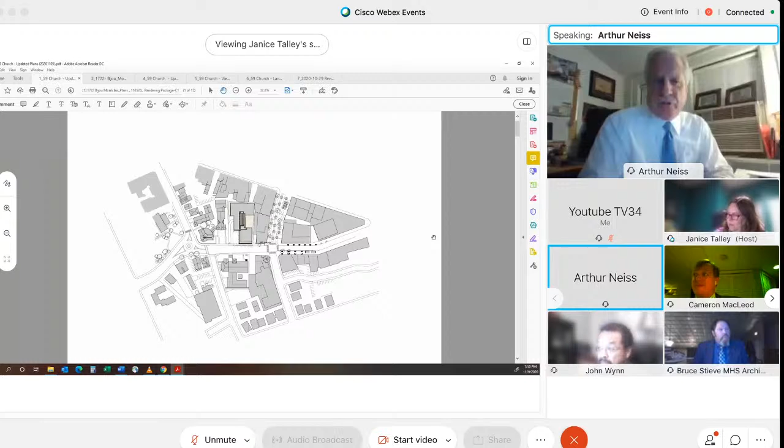So generally, I would ask Mr. Stieve to acknowledge once again that you remain under oath, and you understand that, sir? Yes, I do. Very good. Thank you.

Great, so Bruce, if you can summarize — what's on the screen right now, for the benefit of those who may not be on the video or otherwise, is a colorized version of the updated architectural renderings prepared by Marchetto Higgins Stieve, dated as of the plans submitted to the board, updated to reflect a colorized site plan. And we, I believe, have marked these as — I don't think I have the colorized one on the exhibit list, okay, so I guess it would be A48. Okay.

And I guess it would be A48. Is that the entire plan set that we're marking that way? It is—unless it's A44, the updated site plan dated 11/5/2020. Yeah, it's the one I submitted to you Friday electronically. So that should be the same set. Okay, then I would say it's A44. Okay, then it's A44.

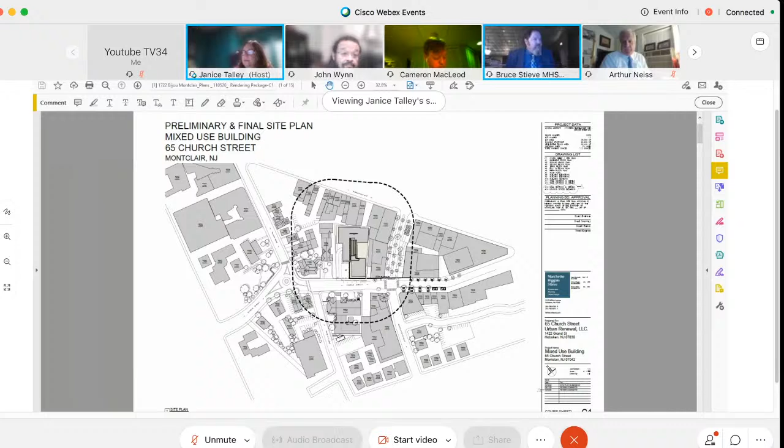Sure. Thank you, it's good to be back tonight. Since we were here last time, we've been busy working on improvements to the project based on comments from this board, the board's professionals, and comments made by the public during the last planning board hearing. We've also had the opportunity to meet and discuss some of the concerns of the board's professionals, and these plans reflect updates based on that information.

So I'm going to start quickly by going through some of the plan changes and then dive deeper into the building facade developments. If we can go to the next slide, please.

So this is the basement parking level. We had a meeting and discussion with Mr. Giosa, the board's parking consultant, and there were some issues he raised in his letter and report to the board about some of the parking configurations. So we looked at ways we could improve those conditions.

Starting in the basement level, we moved the main electric room for the building down into the basement. This required us to relocate two parking spaces to the western portion of the garage, which pushed the parking slightly out under the planted area of the plaza. This allowed us to take the electric room that was on the upper floor and reconfigure the upper floor parking. If we can go to the next slide, please.

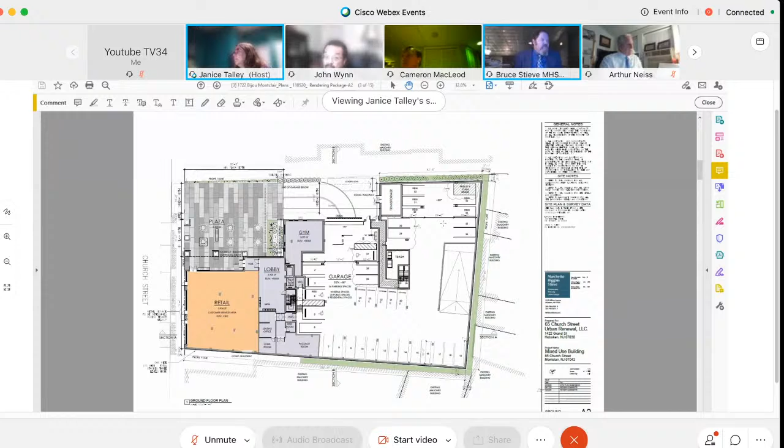The developer for the project has been meeting with the neighbors, and one neighbor who has a restaurant on Bloomfield Avenue suggested he'd like access to the alleyway behind the building to reach his restaurant. So we are proposing to put a door in that parking space located at the back of the parking garage to allow access to the alleyway. We'll be showing this door in the next round of drawings we submit.

There were just a couple other minor adjustments made to this floor. Another thing we did was number and label the parking spaces so it could be better coordinated with the parking management plan, which we'll have further testimony on later. So those are the updates on the first two floors. If we can go to the next floor plan.

And that would be the first residential floor plan, A3. That's okay, you can even leave it here.

The plan changes are pretty much consistent on all of the floors. One of the things we did on the floor plans was identify the affordable units, and one of the items raised in the planner's report was the discussion about the sizing of the affordable units. We've had discussions with the owner of the project, and we're going to be moving the affordable units around within the floor plate of the building. We'll talk about that a little bit more. But in this drawing, we made some adjustments to the smaller 2-bedroom units to show a 2-bedroom, 2-bath.

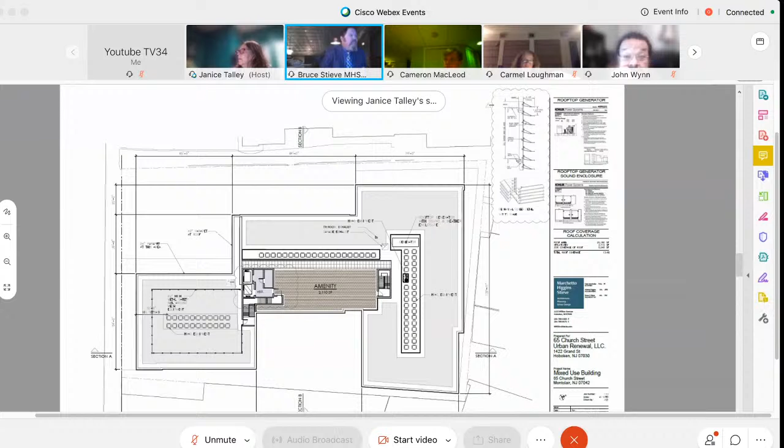So Bruce, do you want to show the side angles to highlight the change you're talking about? Would it be better to show that through this plan set or to move to the renders? The plan set has been updated to reflect all of these changes, but I think the exterior building elevation changes are probably better served in review through the fly-around video and the rendered images we're going to talk about next. So if we need to, we can come back to these, but I think the next thing I'd like to talk about is the three-dimensional video.

Mr. Stieve, before you leave the roof, may I ask a question? Yes. On the generator, what is the purpose of the generator? What will it power? I think I asked that last time, and I guess I forgot the answer. Yeah, the generator is sized to power the emergency life safety features of the building, and to be able to provide enough power to operate the garage doors in the event of a power outage.

So is it just the garage doors, or is it whole life safety? Yeah, it's all the life safety - the egress lighting, the fire alarm systems, all of the life safety functions of the building. There probably will be a few outlets in the lobby area powered by this, but it's primarily for those functions.

I have a question before you leave what you were just showing. Do you want us to ask questions or do you want to wait until you're finished completely? Whatever's easier for you. Okay, so I have a question on A1.

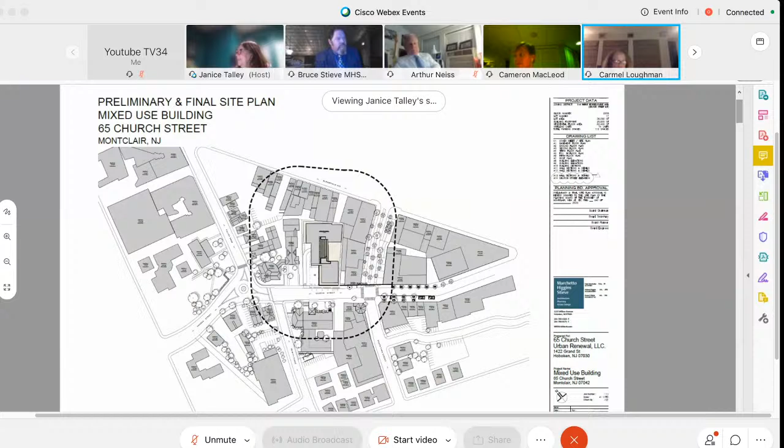So you have these fast charging stations for electric cars, and they're for tenants only, correct? In this instance, the electric charging station requirement in the redevelopment plan was for the residential parking stalls. But the owner has said that if electric charging stations are desirable, they're difficult to manage, so again, we meet the requirements of the redevelopment plan by placing them in this location.

So my question is, if no one has an electric vehicle, will those spots be assigned to somebody, or will they be available to the public? Again, that's a building management issue, and something that building management would control.

What I can say is everything on the bottom floor here is being geared toward strictly residential parking because of a number of safety issues that come from introducing public parking up and down the ramp as it's designed, and as various concerns were raised by Mr. Giosa in talking with him and reviewing the plan. In order to maximize the parking on the ground floor, everything down here is going to be residential.

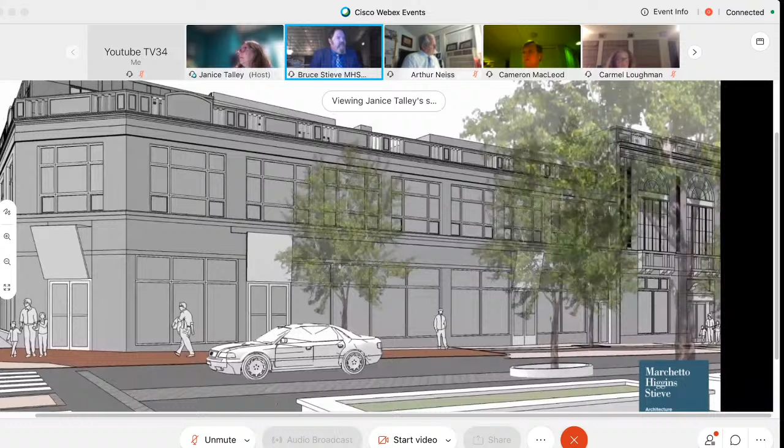The next exhibit we're going to share with you is the 3-dimensional walk around. If you can rewind that, please. Thank you, perfect.

It was discussed, and it's also a requirement of the redevelopment plan that... Do you want me to start it? If you could, just pause for one second at the beginning.

So we've generated this 3D walk around. It's a computer model that walks around the site, and it stops at certain intervals. This is actually the view of the public plaza space on Church Street. This is similar to one of the rendering views that we spoke about last time, but this goes completely around the site. So I'm going to let it run, and if you have questions, go ahead and play it, Janice.

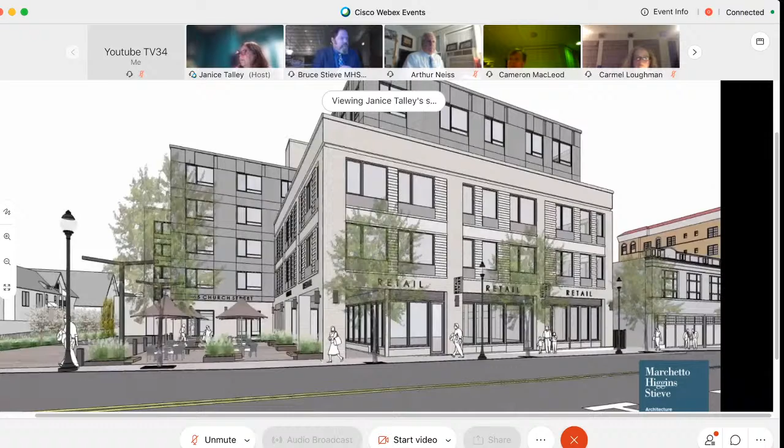This is a view along Church Street.

Coming back across South Park, looking at Blue Mercury.

Then we'll be walking along the eastern side of South Park.

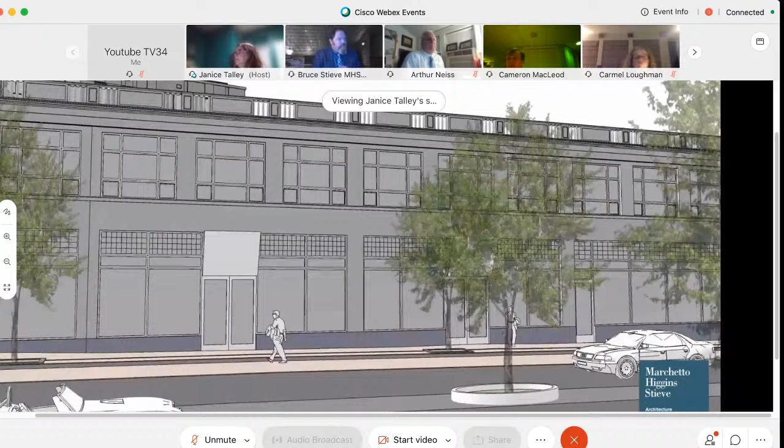You can see the building sticking up above.

This is looking west along South Park.

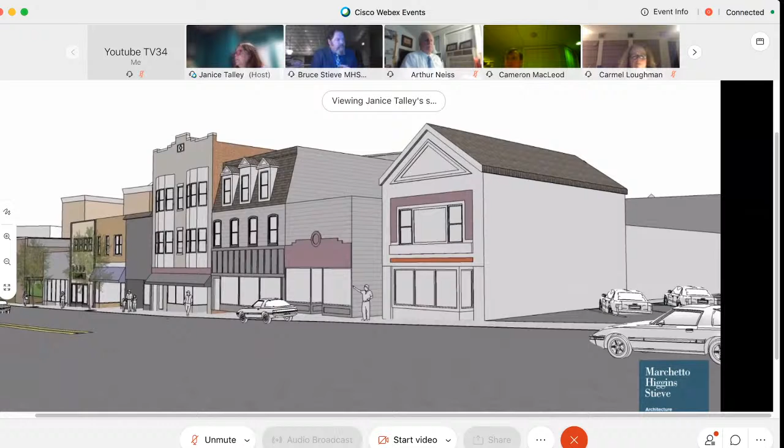Coming up to Valley. Going back to the circle.

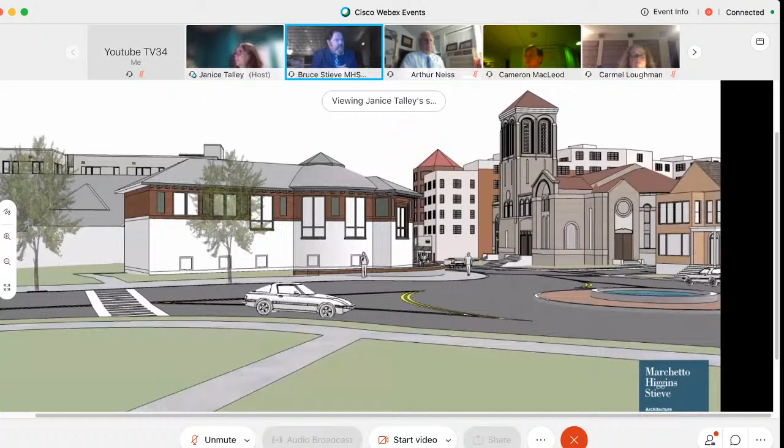I have a question, Mr. Stieve. What is the alleyway gate made of?

Our site civil engineer can speak about that, but I believe right now it's currently shown as a wooden fence and gate, and it's shown only on our property. Obviously, we would like to work with the neighbor at some point to see if we can have a joint gate in that location.

I think I might prefer to see metal. We can consider that.

All right, Bruce, do you want to walk through it? I think the board will note that there were a number of architectural changes from the last go round that are certainly significant. I think Bruce, if you can talk through those and walk through them on the rendering side of things, that would be useful.

Yes, I think that if I can ask Ms. Talley to open the enlarged elevation study. There you go. This is basically a black and white building facade detail of the Church Street side.

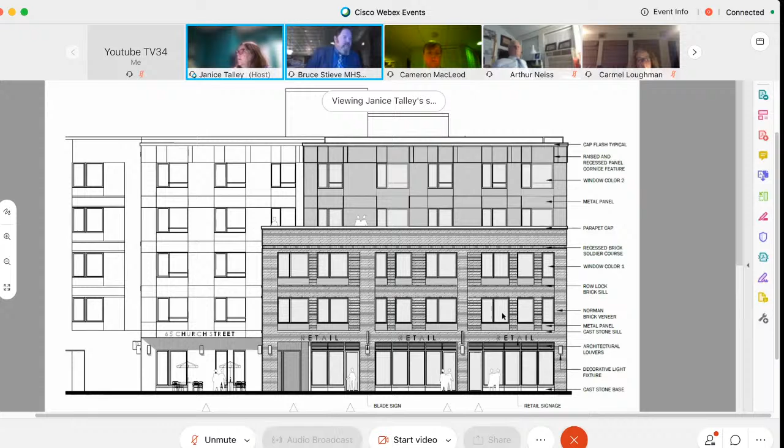The other thing that we did—I don't know if you can zoom in, but we also have an enlargement of this—we actually rendered or drew in the Norman-sized bricks so that you can see what that patterning looks like.

We also dropped off material samples to the planner's office where we showed—we actually included a couple of Norman bricks in the package so that you can see that they're basically the same size as a standard modular brick, but they're stretched out a little bit longer, about 12 inches long. So we did this drawing so that you could see that.

In addition to that modification, we added detail banding at the top of the building. This detail banding consists of projecting and recessed metal panels. This happening at the top of the building reflects a lot of discussion about how buildings in the central business district of Montclair have cornice lines, with a bit of celebration at the top of the building. So we went back and looked at a way that we could incorporate a cornice detail into the top of that metal panel portion of the building, and we've done that. This material change at the top of the building happens around the other sides of the building as well.

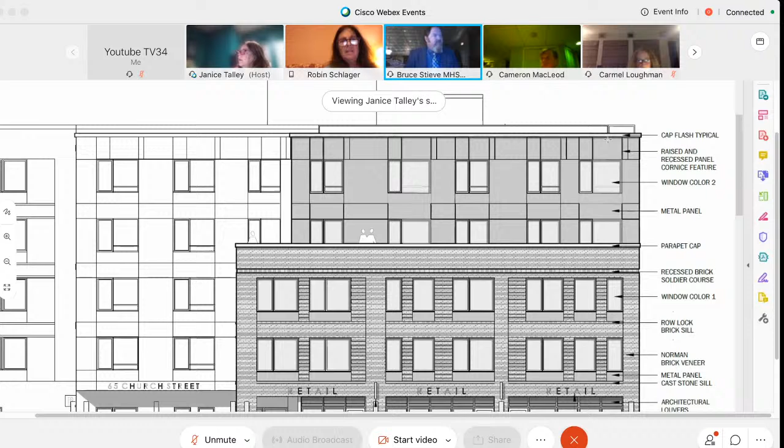Excuse me, is that flash typical? Is that this corner you're talking about at the top of the building? Is that what's marked cap flash typical? No, it's right beneath that—it's called raised and recessed paneling and cornice feature.

So it's that entire top portion of the building that's been designed to reflect the cornice line. You'll be able to see that again when we go to the rendered images that we'll be showing in a few minutes.

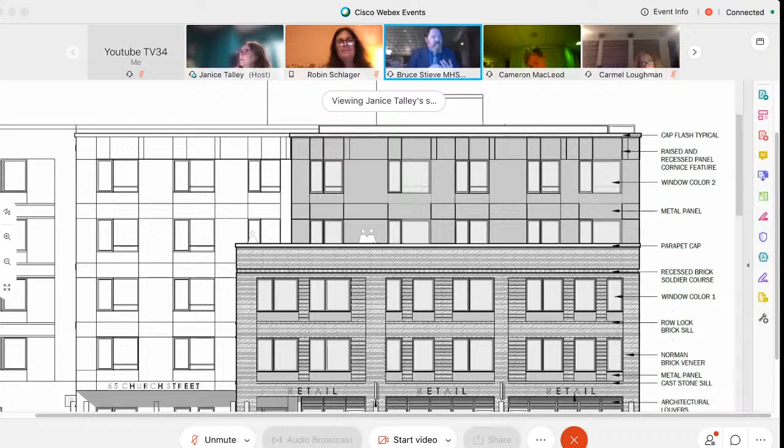So, these drawings were drawn to show the texture in the brick at the base of the building. If you go to the next image, it zooms in and shows the stepping detail of the brick, the soldier coursing, and the cast stone sill. We did these drawings to give you a little more of the flavor of the building facade on Church Street.

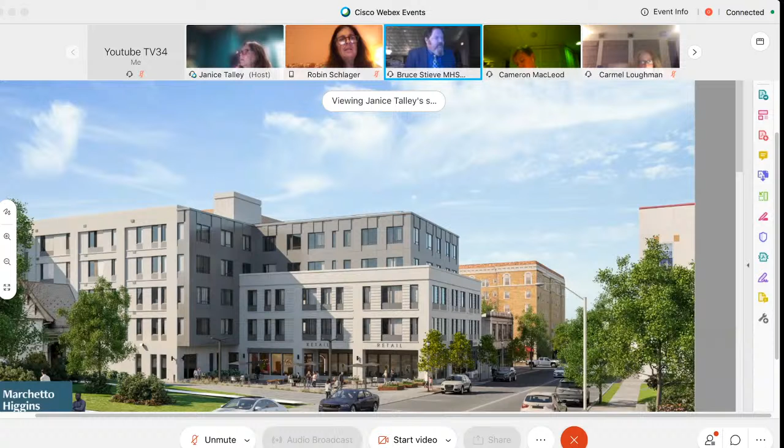And then the next package we'd like to present are updated rendering images. These are the images we presented last time. However, we've gone back in and corrected the colors of the rendering to more accurately reflect the colors of the materials that were submitted to the board. We've also reflected the changes to the cornice of the metal panel system and the materials.

So this is the updated render of the plaza view from Trinity Place. You can see that by raising or projecting out the panels at the top of the building, it creates a shadow line and interest at the top. Again, this is reflective of the cornice lines that you see on the neighboring building.

The next image, please. So I have a question for you before you leave this, about the windows. You said that just the front, when you're looking at the building from Church Street, you changed the windows to make them all uniform, whereas before you had kind of a staggered window look? Right, wherever it was possible, we have simplified the window patterning in the building, yes.

So in your opinion, as an architect, which do you prefer, what you originally put forth? Well, the original configuration was based on interior layouts that we had for the plans. Since that point in time, we were able to adjust the plan so that it worked better with the building facade, and I think the more regular rhythm of the windows facing Church Street is a better solution. Okay, it just, to me now it seems a little less interesting, a little more blah, but okay, sorry.

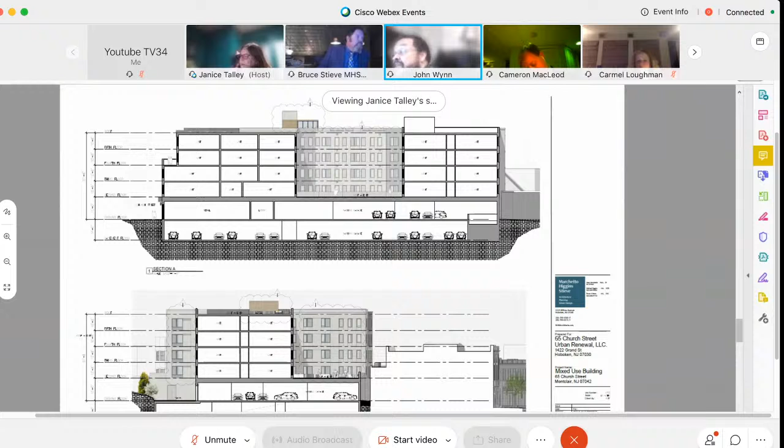While Janice does that, let me go back to that Bloomfield Avenue facade. I may have missed it while looking at the drawing as you were talking, but am I correct that there's a brick detail showing in between the windows? No, it's not going to be a brick detail — it's going to simulate the detailing and brickwork on the front of the building, but done in a stucco system. I see. Is that just on the 5-story side, or also underneath the side that has the gray cap for the top two floors? Yeah, it's consistent across that entire facade.

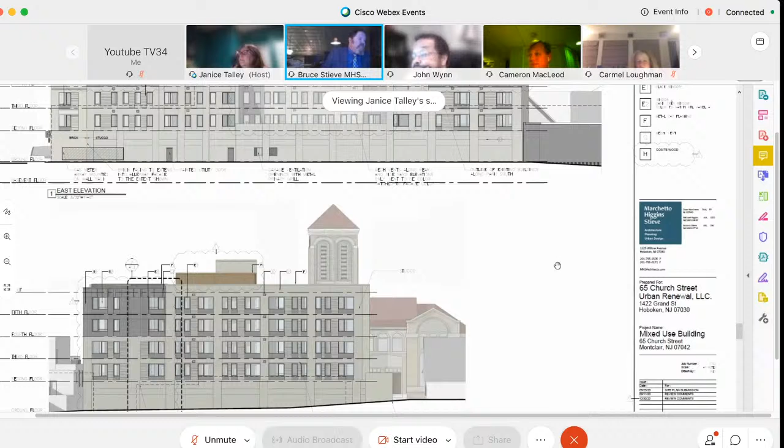Across the entire facade, okay. Yes, you can see that on the elevation at the bottom of the page Janice is on right now. So you can see that line work occurs — oh sorry — that line work occurs in between the windows across the entire facade. And if we zoom in, you can see the cap detail occurs all the way around the building. I apologize it didn't make it into that rendering.

That line you see at the right of the page is the change in materials between the brick pier. Rather than just have a 4-inch veneer on the brick pier, we turned it so that it actually has some bulk, and then we started the stucco after that.

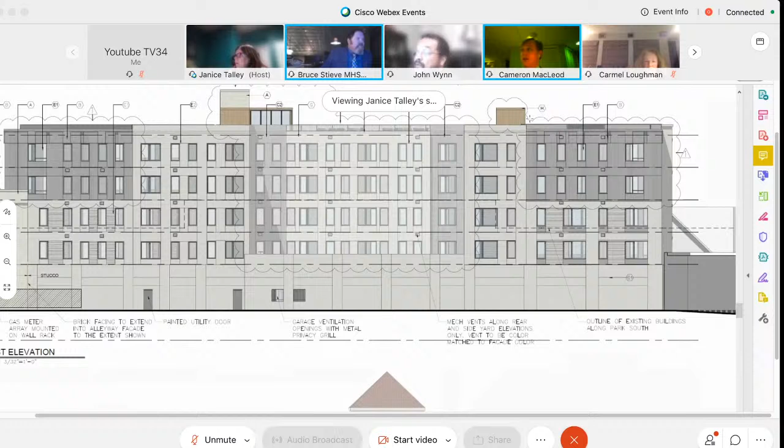Bruce, there's one other spot in here I just wanted to highlight for the board. There's also two spots on the roof, both for the generator enclosure and then the top of the vestibule, where you've got a new item, a new facade there. So I can clarify that a little bit.

You can see up on the roof, and I think, Janice, if you can scroll down just a little bit, so that you can see the roof of the other building facade. What we've done is we've reduced the projection to a higher projection to just that of the elevator shaft. That is being clad in the same brick as the Church Street facade. And then you can see that it steps down, to the stair bulkhead height, which matches the height of the access vestibule to the roof terrace. And those are being clad in a wood material, a stained wood material, to be consistent with the roof terrace material that's going to be up on the roof.

And that's what you see, the brown material that you see on those are the stair bulkheads clad in that wood in the lower image. And when you scroll up to the upper image, you'll see the access room on the roof terrace with the windows.

Can I ask a question, staying on this slide? That's the one thing about the project that seems kind of unsightly to me, is what we see on the roof here. It seems very large. This may be kind of silly, but looking at that picture, maybe you could make it match the tower in the church a little bit? Put a little pyramid cap on it or something? Just to make it look less glaringly different than everything else and mechanical looking. It's just a thought.

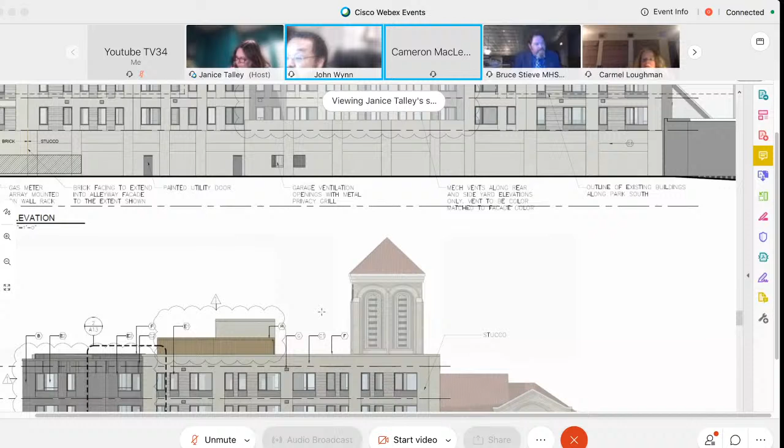All right, do we have other questions on the board? I do. Did the HPC weigh in on this at all, or is that their bailiwick? This went to the HPC originally.

No, I mean the mechanicals on the roof, the redesign. Is that something they would be interested in, and have they seen and commented on it? They have not commented on the redesign, no. And why would that be? Is that not the usual practice? No, the application went to the HPC before it came to you all. But if there are significant changes, don't they look at it again?

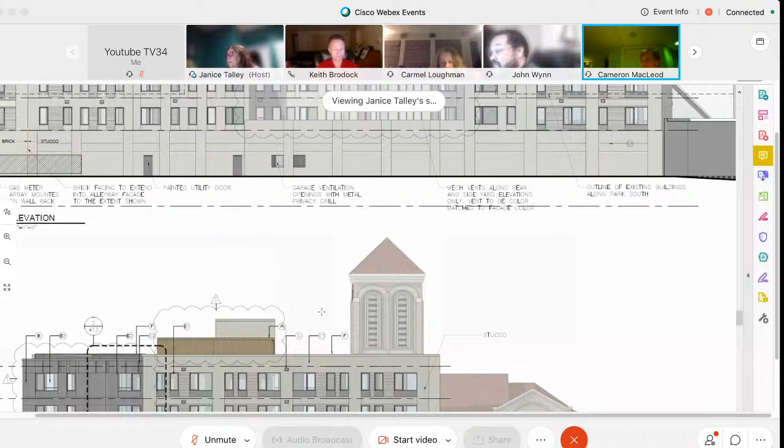Well, first of all, I wouldn't call this a significant change, but I think no, they see it once to see whether it's consistent with the architectural mandate of the redevelopment plan, which I think their report makes pretty clear this was. And maybe this is actually a great segue — I know a number of the board's architectural consultants are on, and maybe they can give some guidance on this one.

So I do have a couple of questions. Staying on this rendering here, I understand there's the cornice cap that projects out on the bottom of the page view. Does that soldier course we see up near the band at the top of the cornice on Church Street continue all the way around the building?

We haven't brought that around at this time. It really was meant to be a detail specific to the Church Street facade, to reflect the detail work of the neighboring building, the Wedgwood building.

It seems a little almost imbalanced to me, and I don't know the best architectural term, but you've got the recessed and projected metal panels that you've expanded, so it kind of looks like a wide cornice line on the metal panel side. Then it continues to this very narrow cornice cap, and I was wondering if there's another treatment that can be done there, understanding this is mostly a stucco facade. As it wraps around to what I think is the western facade that turns to brick, maybe there could be a different type of treatment there just to make the cornice band feel a similar weight.

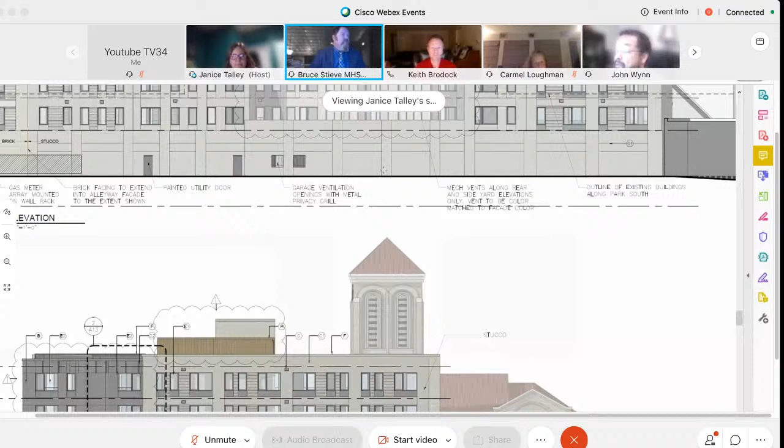We've had discussions with our MEP engineers, and they understand those conditions. They will make sure that when we install the equipment, it's in a room that is appropriate for that type of equipment, and it'll be located where it's appropriate to be located.

If we have to mount it above a certain level, if we mount it on a dunnage or something like that, and have pumps or whatever required for any kind of water controls, we can. I would just suggest over-designing that piece of it, given some of the things we've seen lately, both in town and more related to Superstorm Sandy.

Janice, would you mind going back to drawing A2? Understanding that the elevation of the garage is at plus 307, and the elevation of the lobby is plus 303.8, how does a handicapped person go from those van accessible spaces 4 and 5 into the building? Because it looks to me like it's at a different elevation, or maybe I'm reading it incorrectly, Mr. Stieve.

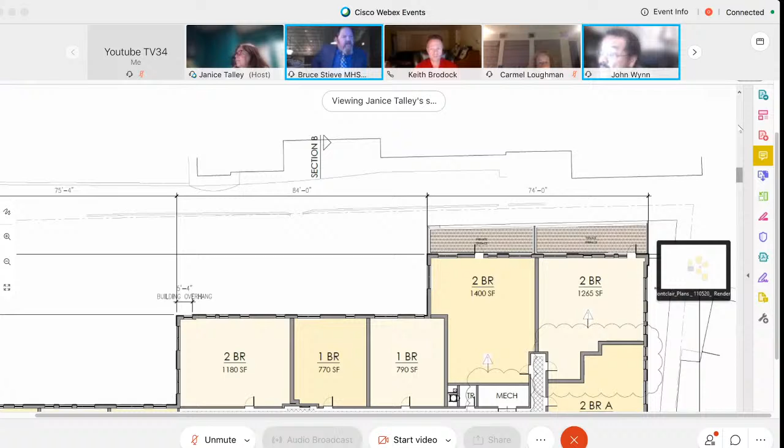That was part of the discussion we had with the half-stop elevator. So a person who would be parking in that handicap van spot would then go into that vestibule in the back of the elevator. They would get into the elevator and go to the elevation of the lobby. So that would be the handicap route.

A person parking from the... I'm sorry, go ahead. No, go ahead. Okay, a person parking just in general from the public would then exit through the door by the pay station and traverse down the walkway out to Church Street.

Okay, so that vestibule does connect to the elevator then? That's correct. Okay, and you brought up another question in my mind. So the public has to, I guess, cross the garage, perhaps go to the pay station and then cross back over the travel lanes to access, say, the public plaza or Church Street?

Yes, there's a walkway that runs down along the building in that location. We have a site civil engineer who can talk a little bit more about that and how that's going to work, but that's the pathway that people egressing the garage would use, in addition to the door exiting to the back alleyway.

Okay, and on the roof, is that screening around the HVAC equipment? Yes, there's a louvered screen that wraps around the HVAC equipment and the generator. Okay, so it's the one shown in the plan as well. That's correct. Okay, and then I think my last question, actually maybe I have two more.

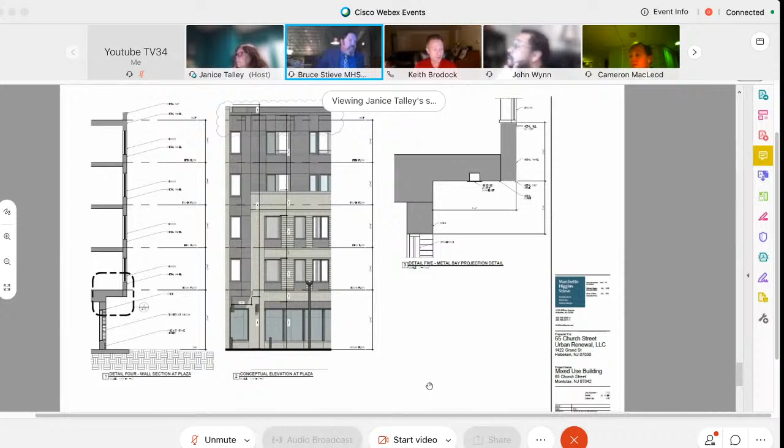I do believe if you go to elevation A11 and A12, there's some level of detail shown on those. Again, if I zoom in, it looks like a recessed, horizontally laid brick. Understood. That's why we did those enlarged elevations. We can try and add color to those elevations for you.

I think that's all I had. Thank you.

I just want to go back to the floor plans that we discussed regarding the affordable units, and just to clarify what we have on the last submission: the units that you have marked affordable are no longer going to be the affordable units. Is that correct? And you're going to give us revised floor plans to show which units are affordable now?

Yes. And the difference between what you're going to supply us and what we're seeing here is not going to be in the layout of the various apartments. It's just going to be the designations.

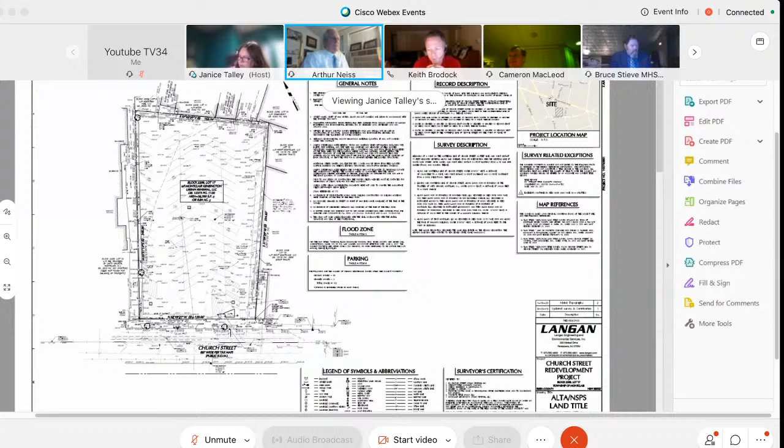The Langan exhibit. So, Chairman, just before we jump into engineering, did you want to maybe stay in architecture with Mr. Smith and Mr. Neiss, or do you want to save that for after site civil? I was thinking about trying to get through the applicant's witnesses, okay, and come back to the architectural issues because we're going to finish with them clearly. So, let's see if we can get to his witnesses, and we can come back.

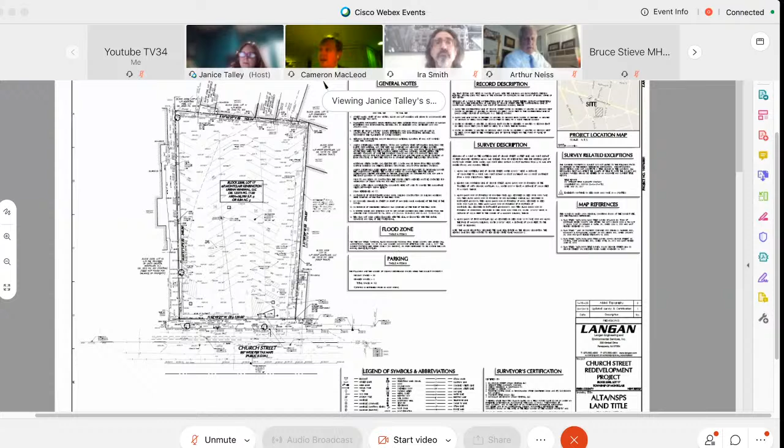You want to hear his bona fides, or? Well, has he testified before? I actually don't know. So I know we've had many engineering individuals. I recognize the name, but the firm, but I don't recognize the individual. I have not testified before Montclair.

All right, well, would you just please give us a basis then to allow you to testify as an expert? Certainly. Mr. David, before we do that, may I ask you to raise your right hand, please? Sure. Do you solemnly swear that the testimony you're about to give will be the truth, the whole truth, and nothing but the truth? I do.

Would you please state your full name and business affiliation for the record? Sure. My first name is Sony, S-O-N-Y. My last name is David, D-A-V-I-D. And I work currently at Langan Engineering and Environmental Services.

And Sony, can you give the board the benefit of your experience, education, and any licensures that you may hold? Sure. So I have a bachelor's of civil engineering from New Jersey Institute of Technology. I have a master's of civil engineering from Stevens Institute of Technology. I'm a licensed professional engineer in the state of New Jersey, and I've testified before dozens of other boards in the state of New Jersey. And your licenses are current? That's correct. Good.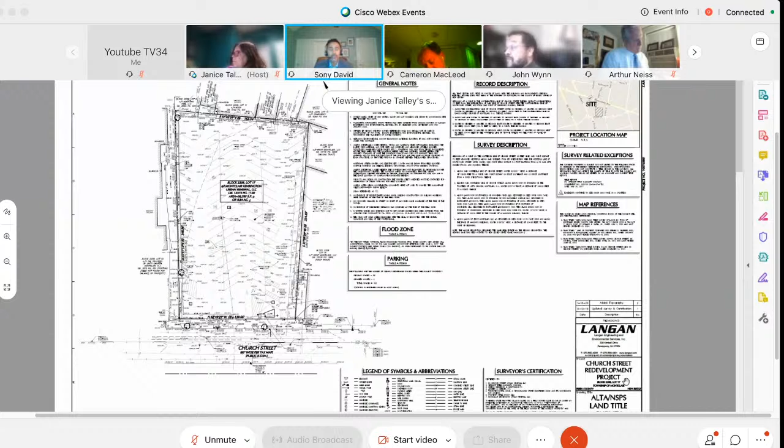Now, the proposed improvements include a new 5-story mixed-use building with 74 residential units, 3,936 square feet of ground floor retail space, and 112 structured parking spaces.

I also wanted to discuss the gates raised during Bruce's testimony at the entrance to the alleyways. They're the eastern and western entrances on either side of the building, which has a 5-foot corridor around the perimeter. As suggested, we will incorporate a metal gate at both alley entrances.

I also wanted to mention, based on our meeting with the HPC, and in order to incorporate some of their comments, we do plan on replacing the deciduous shrubs along the northwestern facade. That's the upper left-hand portion of this plan.

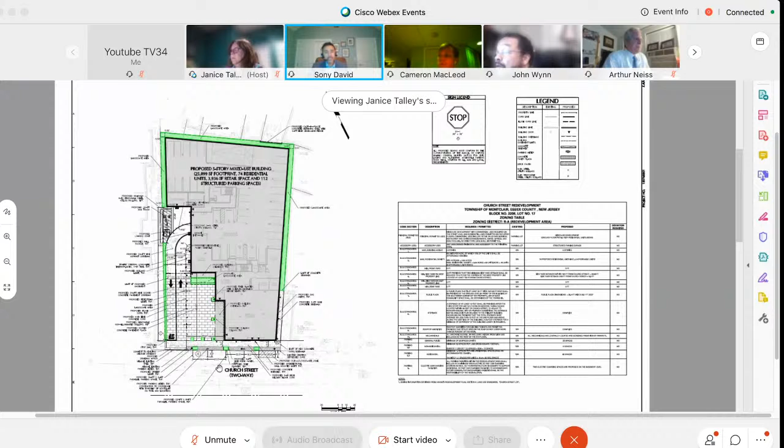Adjacent to the parallel parking spaces, there's also a pickup drop-off zone fronting the retail space for rideshare, FedEx, and smaller deliveries.

The improvements along this street side also include new street trees, which the final tree selection will be coordinated and approved by the township arborist, as well as new site lighting along this street side as well.

At the last hearing, there was also a comment about the site lighting within the interior of the plaza area. There are 2 pedestrian level lights, which are 15 feet high. The question came about how they relate to the second floor residential level.

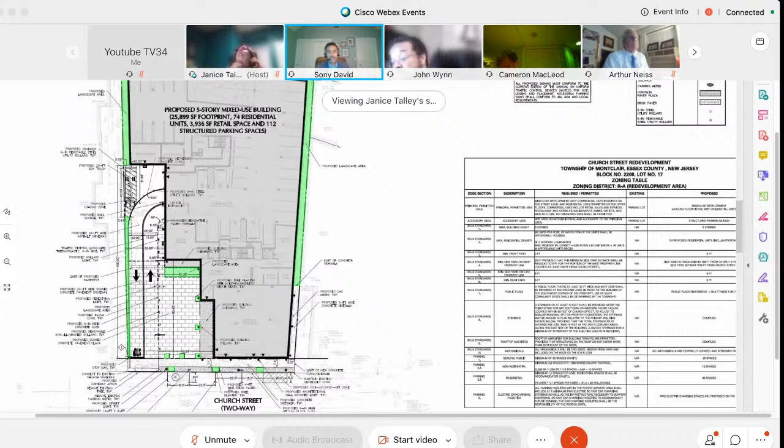The pedestrian lights within this area are down lights, so they have downward facing lights with the LED lamp completely within the fixture. So from your vantage point on the second floor level, you would not be able to see any source of light due to the downward facing lights and the fact that the fixture and LED lamp is within the fixture in its entirety.

I also wanted to let you know that there is a bicycle rack included in the plaza space, which is located at the southwest corner of the plaza near the Church Street sidewalk.

It's within the plaza area, just to the left of where the arrow is right now, correct. This was originally shifted from where the original plans had it, which was in the right-of-way along the streetscape, along those parallel parking spaces. So we shifted it into the plaza area.

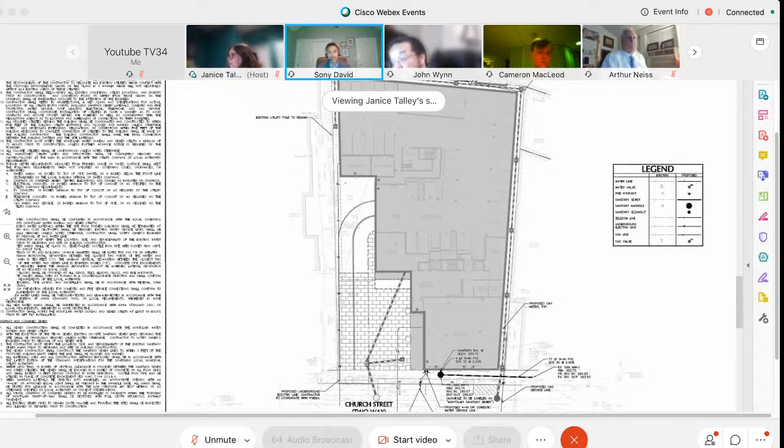This last plan is drawing CS 102, called the circulation plan. We have made updates to this plan. You'll notice there are two insets. The one to the left was provided as part of the package, showing the circulation of a loading truck, a 30-foot long box truck, backing up into the loading space at the end of the drive aisle. On the right-hand side is a passenger car circulation, showing a passenger car movement entering through the driveway and then into the garage.

Just to provide more clarity on the truck circulation and loading operations, a 30-foot box truck is what's sized for loading and unloading operations in this space. It would back down the drive aisle into that loading space. Loading operations will be coordinated with the property manager to be scheduled at specific times, and it's anticipated that a flagman will be provided to manage traffic within the garage while the truck is backing down. The truck backs down the one-way going towards the garage and only crosses at that last portion, where the flagman will have control of the movements coming out of the garage.

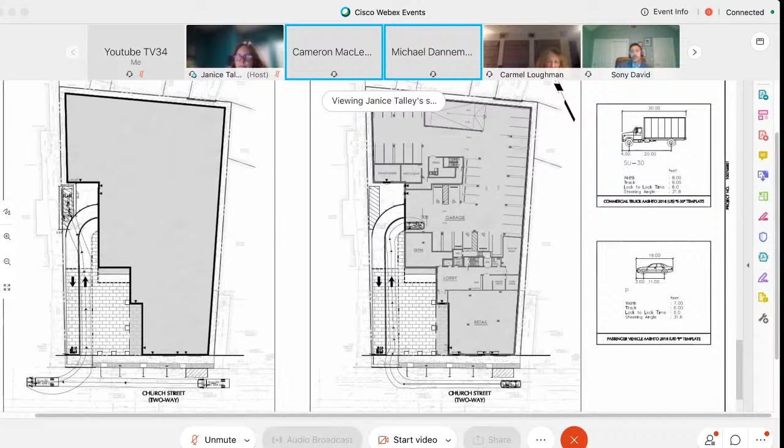Let me make sure I understand your question, Ms. Loughman. What Mr. David essentially testifies about is when you bring the utilities into the building, that's what his utility plan is showing. What you're looking for are really the internal fit-outs.

Yes, yeah, like where electrical outlets are going to go and where the water piping is going to run and where the gas lines are going to run in the building. Not really, I just want to... there's amenity space there.

I just want to make sure that in the amenity space where you have some greenery around there, and some water, we just want to know where that stuff is. That's all. Okay, no, I just wanted to make sure I understood the question.

Sony, go ahead. Sorry, I was going to say I think I misunderstood. I was answering it about the plaza space, but I clearly understand now you're talking about the upper level amenity deck.

Yes, got it. And I know that level of specificity is usually something that's done during the actual construction plans themselves. It's not something that's typically shown, at least in my experience on plans like these. But what we could do is ask the board, if you wanted, we'll represent that there's going to be a water spigot there to make sure that the greenery is properly watered. There's really not much more we can do than confirm that we're going to do what we're obligated to do.

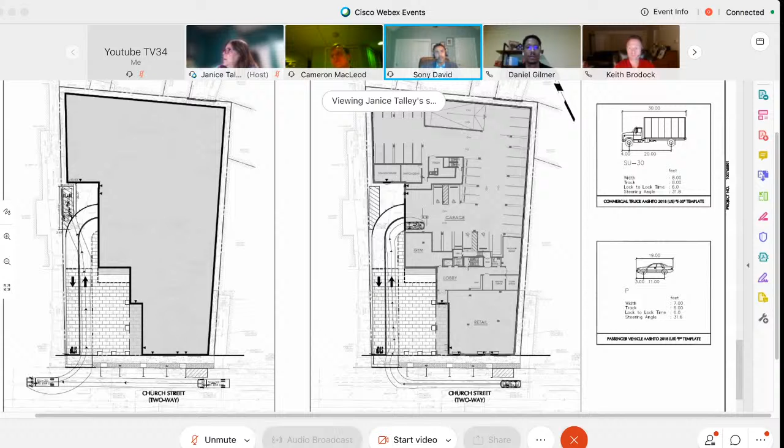I don't think it would be a significant issue, but there would be certain times of the year where that could potentially be a concern. If it would help to have some type of obstruction within that area, it would be tight, but it's possible to fit a board-on-board fence or something similar to obstruct a portion of that area, directly across from the entrance toward the church.

Yeah, I think that would help. It's a good point that it's a little odd with the elevation, because some of the classrooms are lower, so the windows are at or lower than ground level. Then there's also, as mentioned, some stained glass, or maybe it's regular glass, but for the church it's a little higher. So most of the time it won't matter, but even if the church has a concert at night, you don't want these lights flashing across every ten minutes.

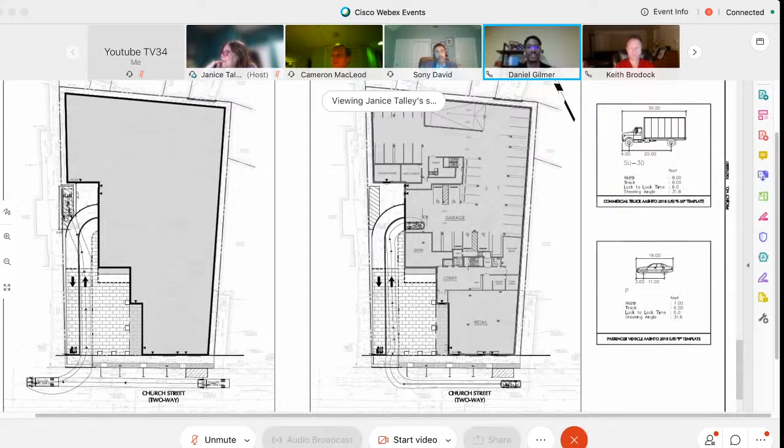And the building could be used any time of day, so you'll probably have a pretty steady cadence of traffic there. So that's just what I was saying—if there's really anything that could be put in there, that would be great. Yeah, no, I think that's a fair comment, we could look at that.

Great. Thank you. Sure. Other questions?

That was echoing my concern, which was really about the sanctuary. I figured the classrooms—and I think Mr. Gilmer clearly has more personal experience with this site than I do—but I figured classrooms probably have blinds, whereas sanctuaries almost never have a blind on the window. I would think, in the middle of a service, it would be very distracting to have lights flashing periodically. So I thank you for taking a look at that.

I did have just a couple of questions. I assume, Mr. David, that the 30-foot box truck is consistent with a typical moving van? Correct, I'd say it's probably a little bit larger than a typical moving van, but yeah. Okay, so that'll accommodate most folks moving in and out of the building.

That's correct. And in terms of vehicles exiting the site—I know you didn't put this on the presentation tonight, but looking at some of the plans, there are parking spaces on Church Street in front of the building. Do you see somebody's vision being impeded by those parked cars when they're trying to exit this facility?

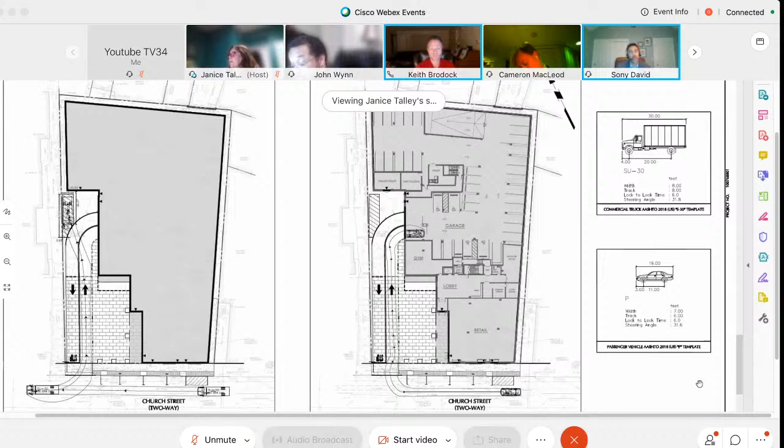I think it's really that balance between properly lighting the plazas while also being respectful of the boundaries, so that you're not putting a lot of light throw on the adjacent properties. The light levels shown do meet the minimum requirements and also do a pretty good job of balancing the light throw so there's no one area that's overly lit, which is a problem when you have very lit areas and other areas that are more dimly lit. Through the use of bollards, pedestrian lights, and building mounted lights, I think it does a good job of distributing light pretty evenly across that whole space while meeting the minimum standards.

And is that minimum standard half-foot candle? Yes.

It just doesn't look like it quite meets it, at least on that exit lane coming out, as far as I can tell from the concentric circles. That whole lane doesn't seem to fall within that boundary. We could take a closer look at that. I think that's likely because of other existing lights that probably aren't modeled. As it gets into the roadway and street lighting, that's normally what happens, where we'll take a closer look and see what existing lights are available that would provide that extra lighting necessary beyond the proposed lighting currently shown. We could definitely double check that.

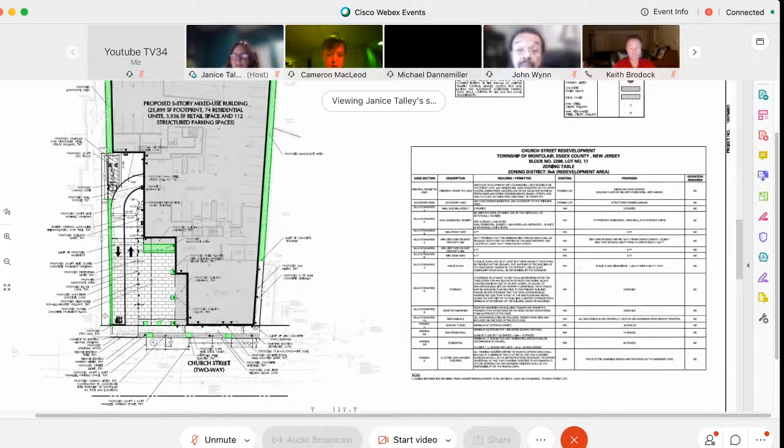I can jump in and assist you in finding things to answer. I did have some questions on the drainage system. I've heard a lot of talk about parking, but I haven't heard anything about drainage. Yes, I have been here the whole time listening. Let's talk about drainage then. Sony, can you talk a bit about the drainage system and particularly how it functions? Mr. Battaglia had raised some questions about locations of manholes, how things tied in, that kind of stuff. If you can kind of walk through that.

Correct. So I'll just generally touch upon the existing and proposed conditions real quick. The existing conditions right now currently all feed flow to existing catch basins that capture the water closer to the Church Street side, and ultimately discharge into the existing 48-inch storm sewer in Church Street. In the proposed conditions, we're basically maintaining those same drainage patterns, allowing the water to be collected closer towards the Church Street side through the inlets currently within the plaza spaces, as well as a series of smaller area drains around the perimeter and the alleyways, all of which would tie back into the existing system and the existing 48-inch pipe.

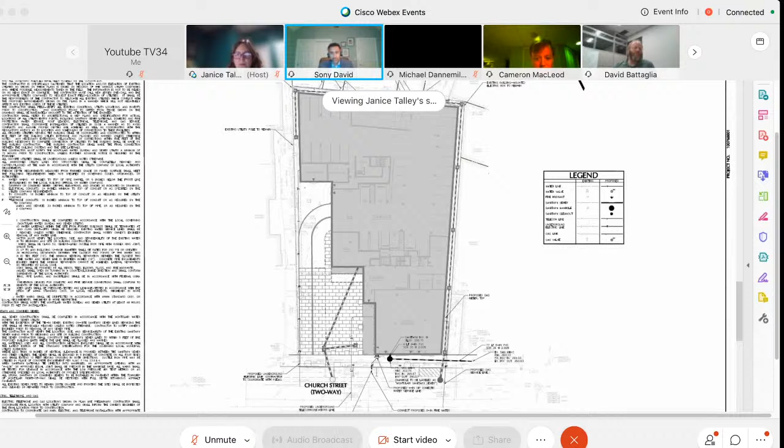I think one of the comments mentioned in the letter was an invert elevation that was incorrectly shown, and that was correct. It does need to be adjusted to provide the adequate cover that's necessary, and we have the ability to do that. I also wanted to note that the conveyance system adequately accommodates the proposed conditions because we are maintaining the same impervious coverage from the existing conditions. We're maintaining the same peak flows, so because there's no increase, there's no detention required. Because there's no increase of impervious coverage, there's no water quality required here. And we're in a PA1 zone, so no recharge is required. Therefore, we meet the intent of Montclair's stormwater regulations as well as the NJDEP stormwater rules.

I believe there was a comment about being able to access and maintain the system based on all of the landscaping that is proposed along the perimeter of this building. I was concerned with being able to actually get to those catch basins that you've got proposed. I think it's sheet number 20, comment number 27.

On the southern edge there is some landscaping that's probably a little bit larger to get through, like you mentioned, and that's really along the western facade facing the church. In all other areas, it's really going to be a low level ground cover that can be accommodated around to provide pervious coverage, but still allow access to these areas. The intent is obviously to maintain them as needed.

There will be a very small amount of flow captured by this. It's really a belt and suspenders system, but you're certainly right—in order to maintain it, you need access, and the means to get access would be going around from the easternmost entrance and working your way around, because access would be difficult on the westernmost side. You are right.

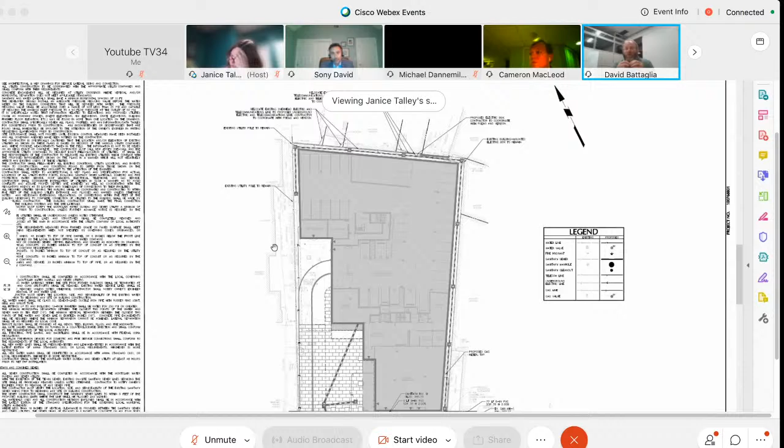Specifically, because there will be so little flow, I'm concerned that the catch basins will end up getting covered with leaves and mulch and whatnot, and end up not functioning at all, because there won't be any cleansing velocity from any actual runoff. Agreed, something to be concerned about.

No, and you're right—we do have a maintenance schedule that we will be providing to the owner as well. The intention is to have this inspected quarterly, just to understand and see what the function is. And you're right, if it is unmaintained and unused, there is a greater degree of it becoming obstructed through leaves and other things within these spaces.

Very good. Was there anything else in particular you wanted him to hit, Mr. Battaglia? I think most of the rest of this was already covered in other testimony. That's what I thought. Yep.

I know I had noted a typo in the utility assessment report, which I'm sure you guys will fix. Just quickly scrolling through, I think most everything else was covered already.

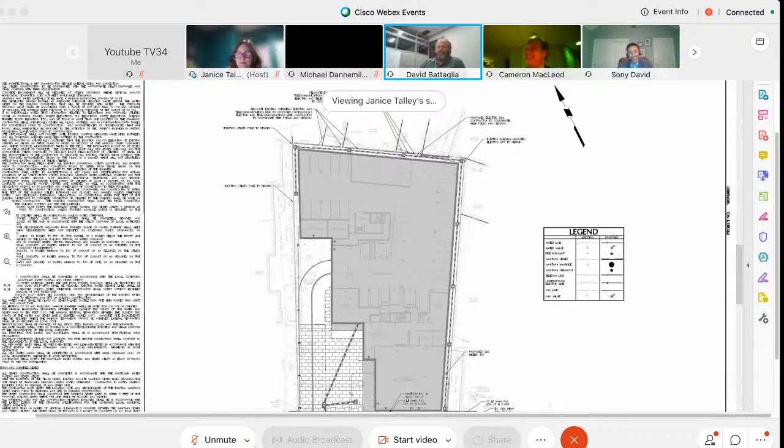Thank you very much. Thanks, Mr. Battaglia. Mr. Chairman, I guess back to you. Sorry, I'm talking and I thought I was unmuted.

Do we have any other questions from the board? Chair Nguyen, this is Mike Dannemiller. Before you go to the public, can I ask a question? Yes. Okay. Mr. David did a great job.

He covered most of the questions I would have asked—the curbside furniture that's being coordinated, the bike rack, he located it. Thank you. The truck turning template, I was glad to see those. I did have a question about the function.

Moving trucks, when they back up to the building, usually have a big ramp at the back of them. I see that the truck backs up right to where a door is, but when a truck's tucked up against the building, how's that going to work? Like a U-Haul style van usually has a ramp that sticks out the back a little bit. How will that work without impeding the access driveway?

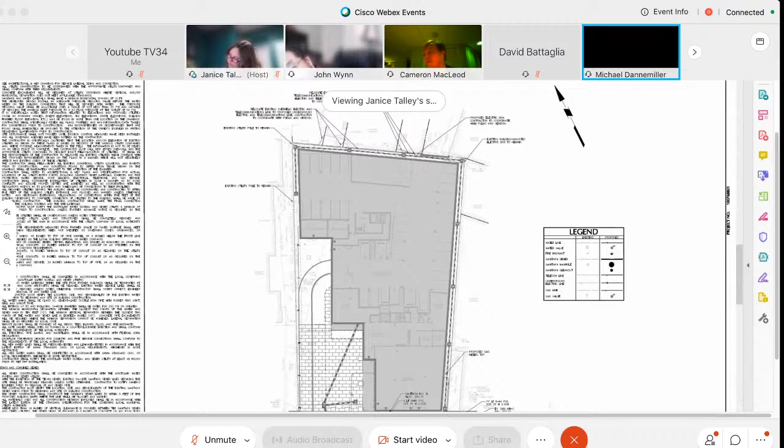That's a really good question. If you could just pull up the next plan and maybe zoom into the loading area, we can see that a little bit clearer. If you could zoom into just that loading space a little bit closer, it could allow us to see that.

So what we've done basically is provided 2 bollards to address this specific issue, because it is a legitimate one. We have about 6 feet of space from the building facade to where the truck would back up into, leaving room for a ramp like you're talking about, or room for people to unload while still protected along the back edge, to have that room to actually have that occur.

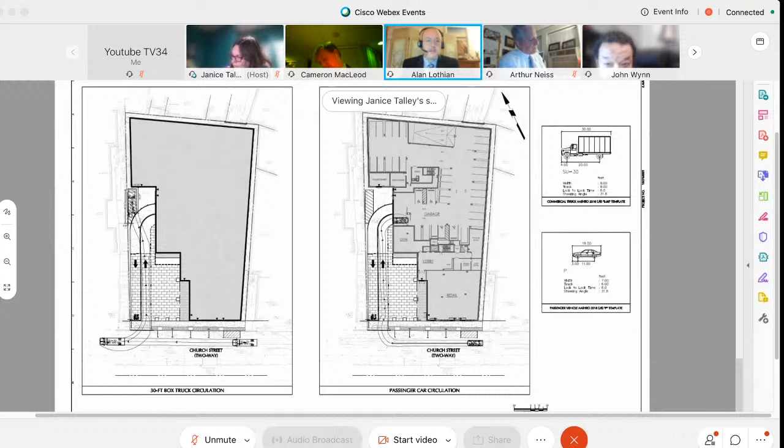And Cam, do you want me to just go through? Yeah, would you mind just giving the board your education, your experience, and any licenses you may hold? Yep, no problem. I have a Bachelor's of Science in Civil Engineering from Rutgers, a Master's of Science in Transportation from NJIT. I'm a licensed professional engineer in the state of New Jersey in good standing, and I have testified before dozens of boards throughout the state of New Jersey. Any highlights you want to make for the board or no? Highlights, favorite towns? We won't put you on the spot like that. I appreciate that.

All right, Mr. Chairman, we'd ask that Mr. Lothian be accepted as an expert in traffic engineering. We'll accept him. Thank you.

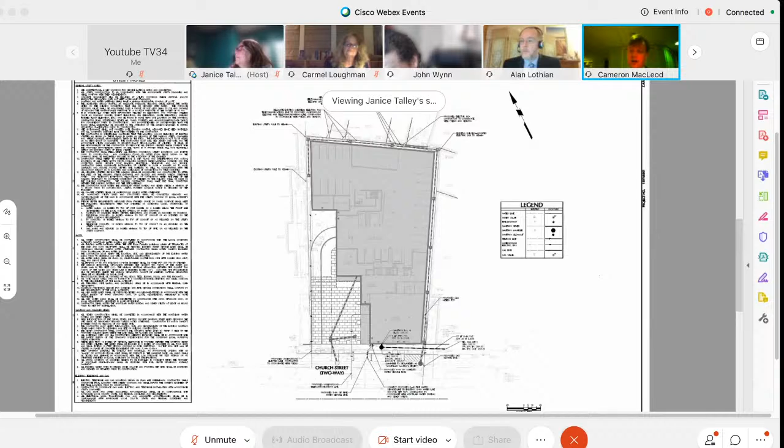Mr. Lothian, you've put together a traffic and parking statement that's been revised through, I believe, October 29th, 2020, correct? Yes. Could you give the board the benefit of your analysis and findings with regard to the proposed traffic and parking for this property? I will, and given the late hour, I'll try to make it as brief as possible. I have two topics to hit: one is the trip generation, the other is the parking supply.

First with the trip generation, the proposed development is anticipated to generate less trips than the current parking lot use when fully utilized. Looking at the PM, which is the more conservative time period, it's 23 less trips during the PM peak hour, and that's relatively significant when looking at that reduction. I also want to make it clear that it's looking at it as a conservative trip generation - we did not take any credit for any mass transit or pedestrian usage, we didn't take any credit for pass-by trips for the retail, and we didn't take any credit for internal capture trips or the fact that it's a walkable CBD where both residents and customers of the retail would be walking the streets as opposed to using their vehicles. So that comparison is looking at it as though it's all vehicular trips coming to and from the site during that PM peak hour.

Just to give a couple of ideas, the census data suggests that over 30% of Montclair residents use some type of mass transportation and/or walk to work or other uses within the area.

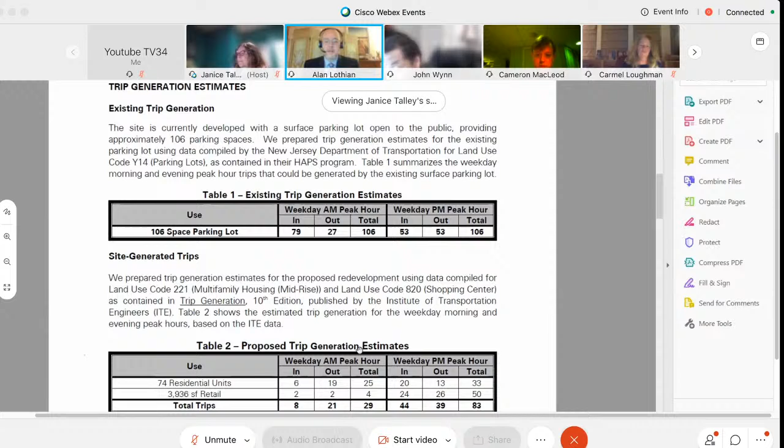So I'll move now to the parking aspect. We meet the parking requirements based on the redevelopment plan, which requires this site to have a total of 112 parking spaces: 20 spaces purely dedicated to the public, 82 spaces for the residential component, and 10 spaces for the retail component.

The redevelopment plan has its own shared parking analysis built in to identify the minimum number of spaces required at any given time for the project. The critical time period is weekday from 6 p.m. to 12 a.m., where a total of 90 spaces are required.

That's looking just at the residential and retail, taking the 20 public spaces out of the equation. That identifies that there would be two additional spaces available for public use during that time. Since there would need to be 82 spaces for residential and 8 spaces for retail...

We went over and above and looked at a shared parking analysis for the retail and residential to see if there was the ability to provide additional spaces on the ground floor level for the public. On that ground floor level, there are 20 spaces for the public, 10 spaces for retail, and 6 spaces for the residential component.

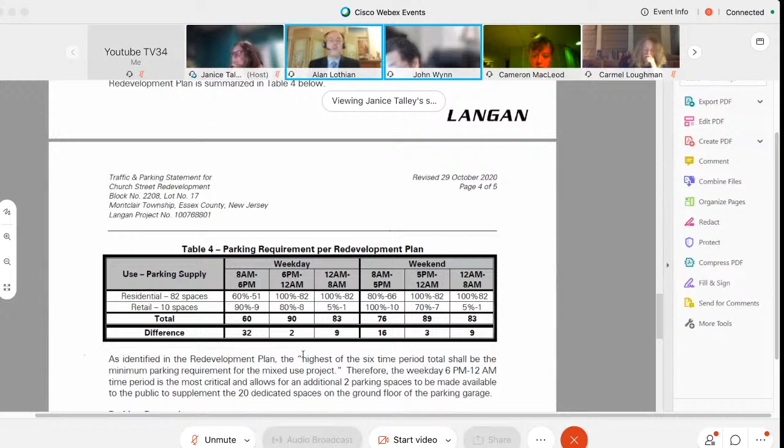We anticipate that the proposed parking supply will not only adequately accommodate the anticipated demand for the development, but also meets the intent of the redevelopment plan and provides as much additional space for the public as possible.

And that is the conclusion of my direct testimony. I'm open to any questions you may have.

Well, there you go. Questions from the board?

I have a question. So what are the hours that the public can use this parking lot?

What was identified in the parking management plan is that public access to the garage will be restricted from 12 a.m. to 6 a.m. So from 6 a.m. to 12 a.m., the lot will be open to the public, to accommodate any number of uses in the downtown area. So basically there's no overnight parking from 12 a.m. until 6 a.m. Yes, and the decision was that's for the safety of the residents.

To restrict it to residents only during those time periods. And I'm sorry, but did your analysis take into account that on Friday and Saturday night the public will want to use this until 12 a.m.? I was reading some cutoffs at 8 a.m. and 8 p.m., excuse me, and I didn't quite get it.

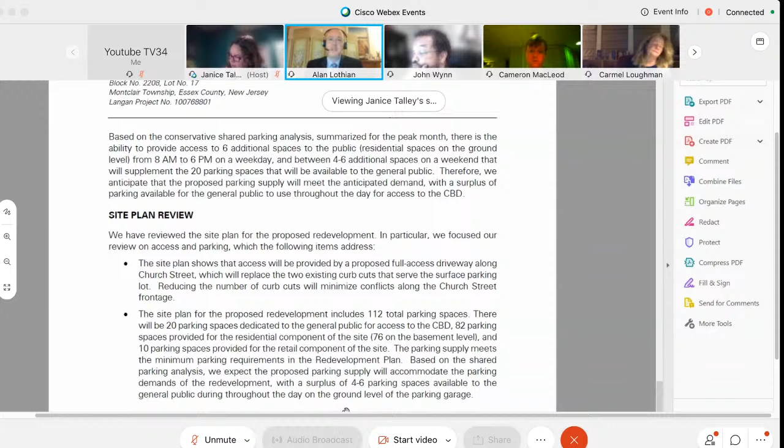So that the residents, when they're coming home, if they need those spaces, they can utilize them. Those 6 additional spaces will be signed for use by the public from 8 a.m. to 6 p.m. But the 20 spaces allocated to the public are available every day until 12 a.m., from 6 a.m. to 12 a.m. Yes. Okay.

Other questions? Just out of curiosity, how utilized is the existing parking lot compared to full utilization as you have in your report? I'm not sure how utilized it is at the moment, but historically it's been quite active. So when I say fully utilized, it's active as a full operational lot, which it has been for the recent past.

So how do you feel the public will anticipate or sense the traffic coming in and out of the development compared to what the lot currently experiences? Again, I looked at it as conservative as possible. If we take into account all those credits I described with respect to mass transit, walking, and interaction between the uses, you will not notice a difference between what's happening today versus in the future when the project is built.

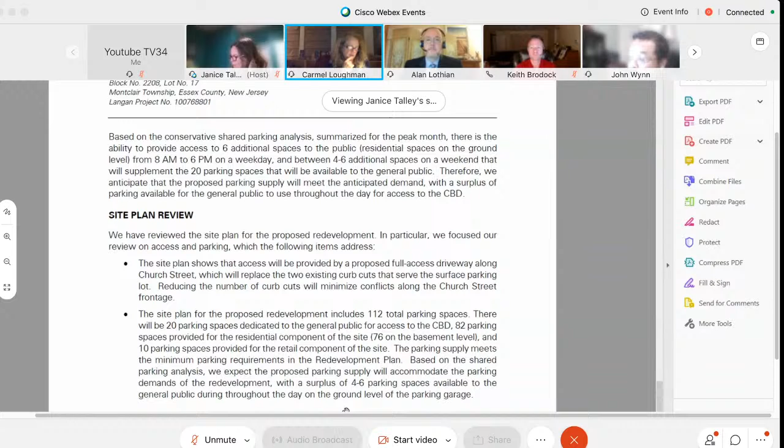Thank you. I have another question. Will there be any signage that will show people there are X number of spots available to the public? That's really an operational question, but my understanding is there will be something put in place in the PMP, the parking management plan, where the public will be identified if there are no spaces left in the lot.

Who's going to address the parking management plan? Is that you? That is not me, that's an operational question. Somebody else will give testimony about that. Well, if there are direct questions on it, Ms. Loughman, I think what we can do is ask a member of the ownership team to step up and answer some of those, because it's really operational — here's our experience, here's how we've managed it in the past, and here's what the plan says.

Because basically you don't have a parking management company yet? Well, the operator hasn't identified a parking management company that's going to handle this. Given the size of the garage, frankly, I just don't know if there's an external operator, internal operator, the whole nine. My understanding is that there will be an on-site manager who will put signage up should the lot be full. Yeah, a sandwich board thing, but there's no electronic count of how many spaces might be available.

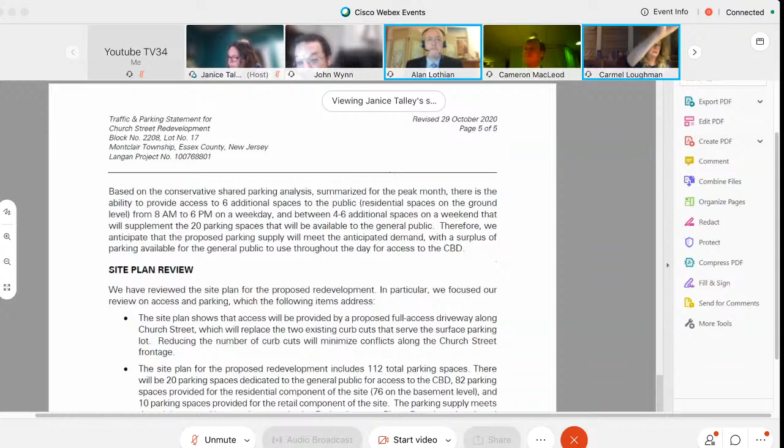I guess they would have to, because you're supposed to provide 20 public parking spaces, and that's not exact. They will not be parking in the public parking spot. Okay. Maybe it becomes one of those 6 spaces, huh? Might be, possibly.

And quite honestly, I don't understand your table 4. What are you subtracting to get the difference? I didn't really get it. Table 4 shows 92 spaces provided for the residential and retail use. The 20 spaces for the public are not part of that table, as identified in the redevelopment plan. That's for the calculation in the redevelopment plan.

So really it's 112 spaces. I don't know, I can't see the math here, maybe I'm just being dense. But if you look on the left-hand side, there's 82 spaces for the residential, 10 spaces for the retail. Right, and during that time period, 6 p.m. to 12 a.m., you need 82 spaces for the residential, which is the entire residential lot, and 8 spaces for the retail, so that leaves 2 spaces available during that time period. Okay, in addition to the 20 spaces. Yes. Right, all right, I got you.

One more thing, I take issue with your assumption that mass transit is available at this site. It's really not. The railroad stations are a 17-minute walk and an 18-minute walk, and nobody really does that in inclement weather. And the 30% you're saying use mass transit in Montclair, typically that's been the train to New York. Both the Walnut Street Station and Bay Street Station are within three quarters of a mile, which is considered close in the traffic world. But Google says it's 18 minutes and 17 minutes on foot, which seems kind of far to me for the average person.

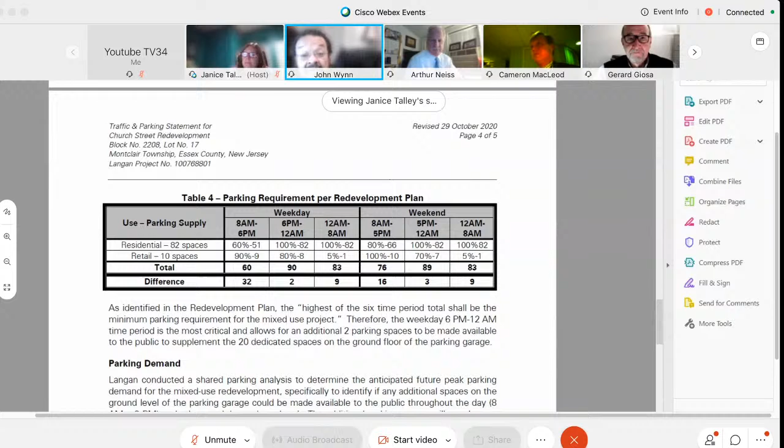Do we have other questions from the board? Yes, I have one. Mr. MacLeod, you've not entered into a redeveloper agreement with the township yet, have you? There is an existing redevelopment agreement with the township. Does it cover this topic? I honestly don't know, Mr. Chairman, but can we find out?

Well, here's what I'll tell you. Yeah, I'm not asking you for the specifics. I'm asking, is it covered? I know all of the items that are covered in the course of the plan that were to be negotiated with the township were negotiated with the township and exist within the agreement. I realize it's a circuitous way of saying yes, but I think the answer is I don't know. The answer is I don't know.

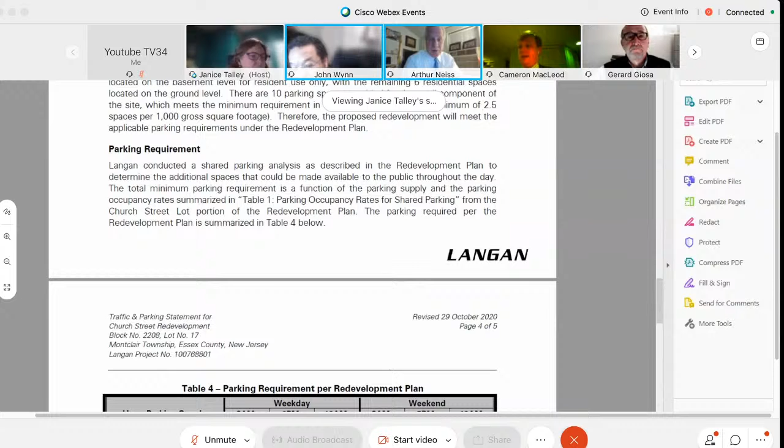Cameron, it was my understanding you don't have a financial agreement yet with the township. That's a PILOT agreement, which is different from the redevelopment agreement. I thought your question was, is there a redeveloper agreement? It actually was my question, but now you've raised a different issue. And the chairman has raised a different issue. Do you have a copy of the redeveloper agreement, Mr. MacLeod? I do. Would you mind sending it to me? I can. You have to do that right here, right now. I'll send that to you after the hearing. That's fine, I appreciate that. Yeah, no problem.

I would say a quick review of the redevelopment agreement - it's silent on pricing for the public parking spaces. I would suggest that it's in the interest of the developer to make sure those are at an appropriate price point, and maybe that's something that gets negotiated as part of the financial agreement as well. Let's see if we can sort that out to figure out where exactly it goes, because it's beyond our purview as the board to deal with that issue. You just have to make sure there's public space there, and we do want to make sure the spaces are available and affordable to the public. Understood, Mr. Chairman.

Other questions from the board? Chairman, this is Mike Dannemiller. I do have a question about the trip generation. I'm curious if there were any commitments about land use assumed to be in place for that trip generation. It'd be a big difference if this is a coffee shop as opposed to similar grab-and-go markets like we've seen in some recent developments. Has that topic been covered? We had provided your office with a response in the letter dated September 18th, and I believe the latest comment letter from your office identified that it was sufficiently addressed. Okay, thank you.

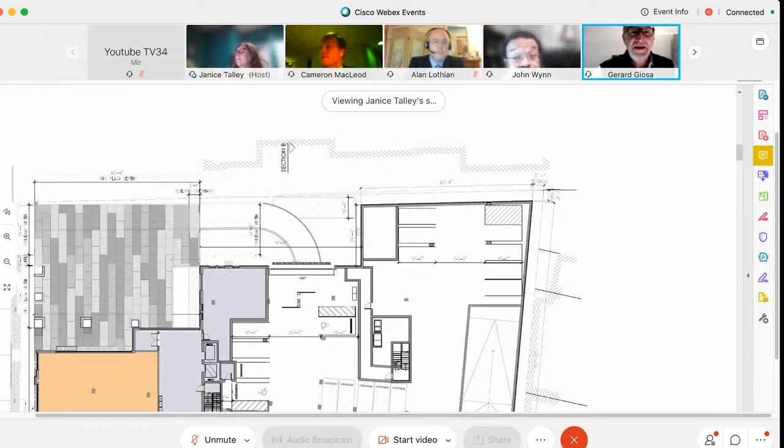There it is. Okay. So I guess I'm zoomed. You can zoom in on the left side of your screen with the little zoom in function there. But I'm zooming in on the area with the parking gates. And right to the right, okay, so just to the right of the parking gates, you can see that's where the pay stations are. And so now we have an area here where we have the parking gates, we have the pay stations, we have this 90-degree turn into the garage, we have a trench drain.

I just think there's a lot going on here. I know you don't like to have pedestrians and these gate arms in the same general area, especially without some kind of bollards or just something in between. The area just seems like it needs to be cleaned up. And in addition to that, the fact that there's the loading zone just above that, I'm just wondering about move-ins and all the activity through this area.

So I don't know if this is a question for Sony or for Alan, but have you guys given this area any additional thought in terms of pedestrian movements and circulation and safety and access? How are we going to walk from the garage out to the street and so forth? I'm going to suggest that's probably a Sony question.

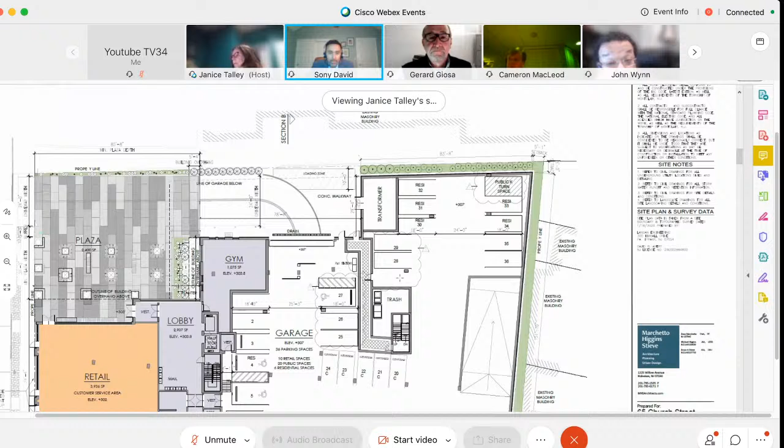I think that's probably more of an operations question in terms of how the functionality of the management firm will allow the timing of the actual loading operations to occur, and how that basically functions across the use of the space. I don't think they would want it during peak hours, where you're going to have a lot of turnover and other retail patrons using this space. So it's going to have to be managed during time frames that make sense for move-ins to occur, where there's less traffic within the garage. But having a scenario like this, where you're crossing at the entrance, you would need their involvement to basically have it be a smooth operation that doesn't deter from people moving their furniture into the space, as well as having cars coming in and out as they need to.

To summarize, it would be heavily dependent on coordinating with management. Management has already made a pretty clear representation, through the parking management plan and elsewhere, that they're going to have limited hours for any kind of operation like that anyway. So that's the solution there.

That's not the only issue, right? Well, again, there's a lot of pedestrian activity near those pay stations and the gates. I presume that folks, after they use those pay stations, or after they park in the deck, if they're going to prepay, they're going to want to walk out across the trench drain onto that sidewalk, to get down to the street. I guess these items can be addressed when you get into the next level of detail on the operational plan for the parking, but as I said at the beginning, this area needs to be cleaned up a little bit.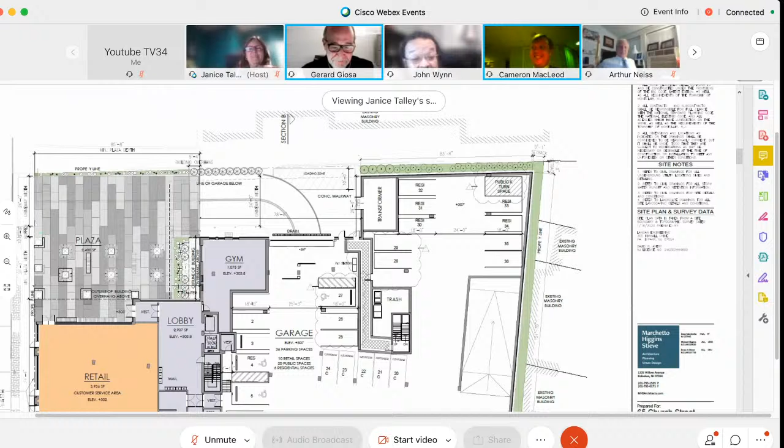So do we have any questions from the public with respect to the parking testimony that has been presented this evening? Does anybody from the public have any comments? I have unmuted you, but I don't think you actually have a microphone. Questions? They don't have any questions. Members of the public, you can also type your questions into the chat function or the Q&A function.

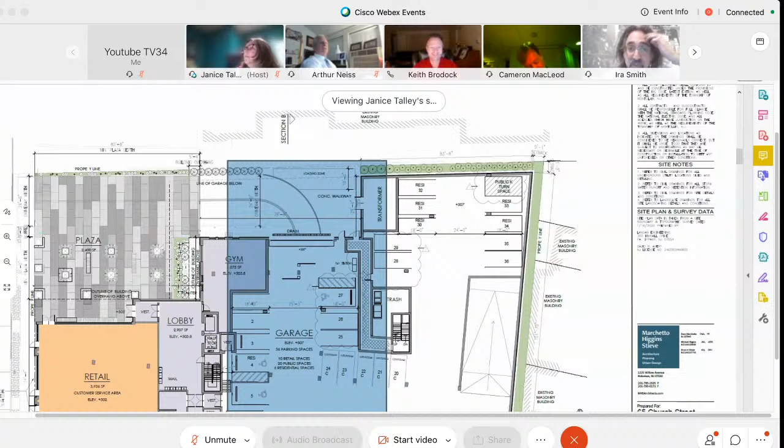I was just pointing out that the ingress egress at the garage entry is directly opposite the sanctuary of the Unitarian Church. I think there might have been a misunderstanding, but I know both properties well, so I strongly endorse some kind of screening. I know the space is tight, but because of the very frequent use of that sanctuary, I think it's appropriate. I know there's a grade change as well, so it's a problem that should really be looked at in the field and with the topography. There are windows in that sanctuary, so this is a real issue.

I'll try to go through everything else quickly, and avoid maybe even bringing up imagery, if we need to do that, I guess we could. I'll use my last memo dated November 4 as a point of reference.

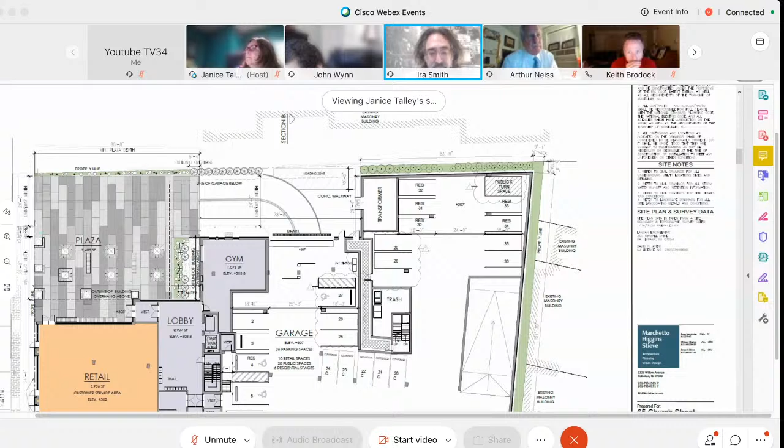Been introduced at the top of the 5-story facade. I think that under-explains it, or even undersells it. As I understand, each of those recesses...

Yeah, you're cutting out for me, Ira. I would say it's not quite as bad as it was before, but it's still a little distracting in that it's still a little bit in and out. I'm not sure, Mr. Chair, if you were going to pause at some point, maybe we can get the technical pieces fixed for the next one, because Ira, we definitely want to hear all the pieces you're saying, but it's tough to follow. I'm not sure if you're pausing at key moments or if I'm missing a word. So it's hard, Ira, can you dial in on your phone?

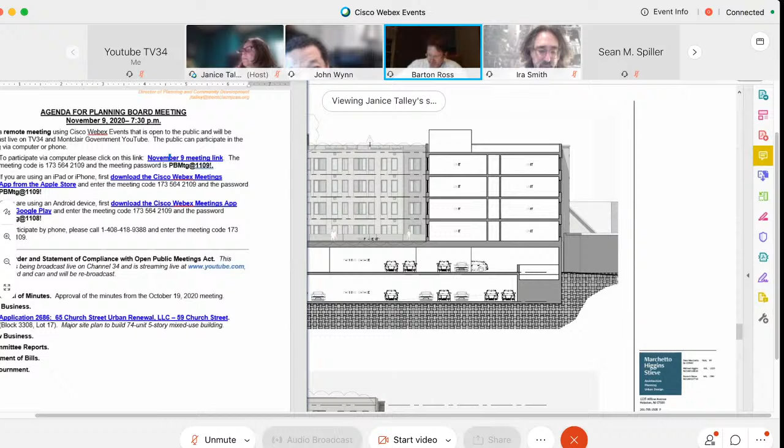Perfect. All right, so I think architecturally speaking with this application, we've had numerous conversations over the past few months with Mr. Stieve and Mr. Smith via Zoom and phone calls. I think they've been very productive. I think we can all agree that the plan follows the redevelopment plan now.

The garage entry, not facing Church Street, and there's some details to work out with the lighting, but that seems to be a very good gesture with this new plan. The bulk massing is very good.

I brought up a bunch of new changes for this time that I think are moving in the right direction. That includes the masonry facade changes, the enhanced Bloomfield Avenue facade design that the HPC and everyone has been concerned about. Mr. Stieve's made a really good effort to try to detail that facade. He mentioned that he's even spoken to the property owners on Bloomfield about the little park there, to see if that would work with the new design. So they've been very conscientious trying to work with their neighbors.

The raised metal panel cornice, as you see at the top of especially the 5-story residential portion of the building, that detailing has really made the 5-story residential facade look a lot better. And as I've been pushing the entire time, there's a differentiation between the 3-story retail and the 5-story residential, that there should be more of a contrast and more of a dichotomy between the two parts.

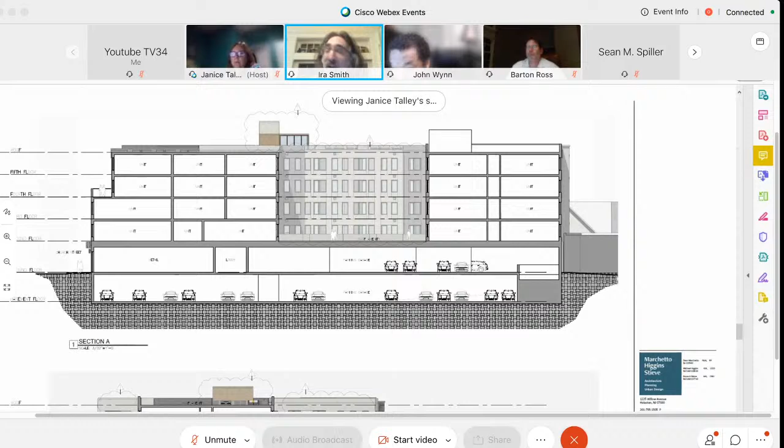We talked in our memo, the update from last week, about the Church Street Plaza that's proposed. This was a question which perhaps Bruce can answer. It looks like it's been updated to reflect having true masonry pavers as opposed to a concrete slab that's been scored. Our concern has always been that the plaza not feel industrial or stark, and when you talk about a concrete slab that's scored, the uniformity of finish ends up producing something that feels like a large work area in front of a warehouse instead of something more human scaled. So am I right that that's been updated to reflect masonry pavers? No, Ira, it's still intended to be concrete, but it is intended to be decorative concrete, not just a single tone of concrete - it's going to be scored into a pattern and stained so that it has a variegation to it. It's not just one tone.

So I have seen successful versions of that. What I think I'd like to do while we're still in this phase is learn more about what kind of system you're referring to, Bruce, and maybe look at some precedents so we can really talk about the scale and texture and colors you're talking about.

That brings me to the last couple of areas. The material samples were delivered. I don't know how many planning board members got to look at them.

At the risk of surprising everyone here at this hearing, I was a big fan of the lighter brick, and I support the dark zinc.

But when I saw them, I realized it's an issue that I think needs to be rethought. This could be resolved through the hearing process, or in reviewing finishes after the fact. I found the white brick, which isn't a snow white, but a pretty bright white.

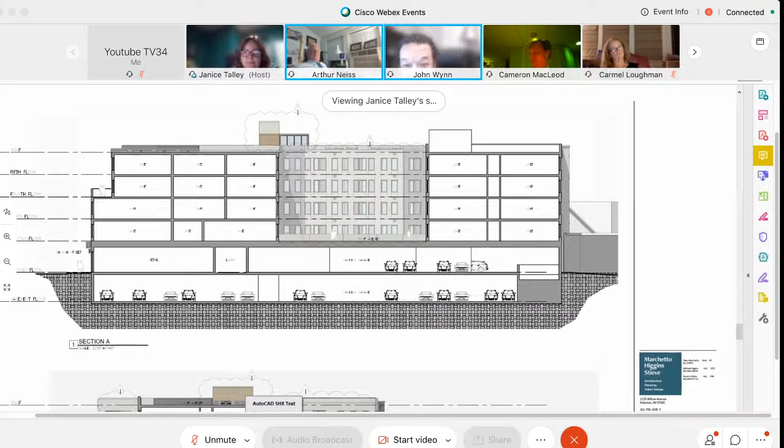Do we need any extensions? You'll consent. We do. I don't believe we do, but we'll consent anyway. All right, very good. We will see you at the hearing. Thank you. Arthur, I'll be in touch.

Cameron, if you didn't consent, December 7th would truly be a day in infamy. You know what I mean? Oh, boy. Well done, sir. Well done. All right. Thank you, Mr. Chairman. Have a good evening, everyone. Thank you. You too.

All right, do we have any reports? We don't have anything specific listed. No, we don't have any reports. We'll have a quick meeting on November 23rd, just to do some housekeeping, set the calendar for next year. We've got some resolutions to adopt, but that will probably be a relatively quick meeting.

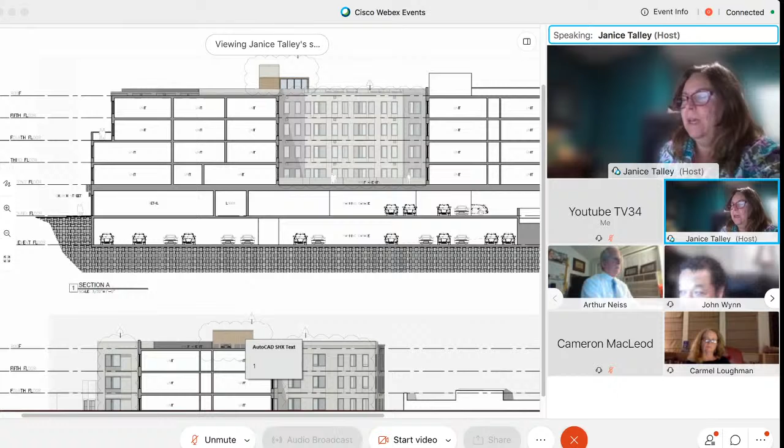So December 7th will be the next meeting for this application, and we've established a special meeting of December 14th for the amendment to the master plan.

Okay, very good. I have a question for you. We were supposed, earlier on in the year, I think we were supposed to look at the zoning board's, what the business they did last year, and to look at some of their recommendations. I don't think we ever addressed that. We have not had an opportunity to do that. So because we didn't do it the year before either, right? So it's two years now that we haven't done it. So maybe we need to do that. That'll be on our agenda for next year.

And what's going on with the stormwater plan? It's going to be part of the master plan amendment at December 14th. Okay, so I submitted it to the master plan committee for comments. We did get comments from the township engineer. And it's a pretty technical report, as you know. I'm learning more about stormwater management than I ever thought I'd know in my life. So we do have a time frame for getting that adopted so that we can have the implementing ordinances in place by March 2nd.

I think it's important to get the public hearing done on that element. Yeah, so maybe we can designate a January meeting to put that on the agenda with the zoning board issues. Well, I was going to do that December 14th, the same night. No, I'm sorry, for one of our first meetings in January, to get that on the agenda so that we can give some attention to that.

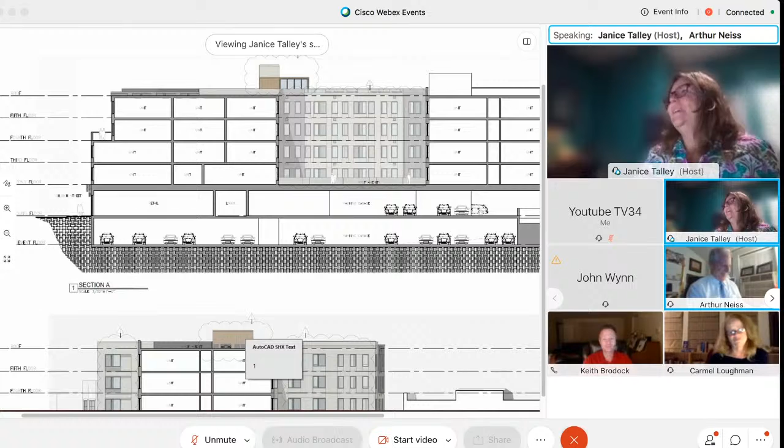Okay, all right, everyone. Thank you very much. Have a... no, we still have one more meeting before Thanksgiving. Okay, so yes, we do. So yep, so I will bid you adieu until that meeting. Have a great evening, everyone. You too. Bye-bye. Thank you. Bye. Good night.